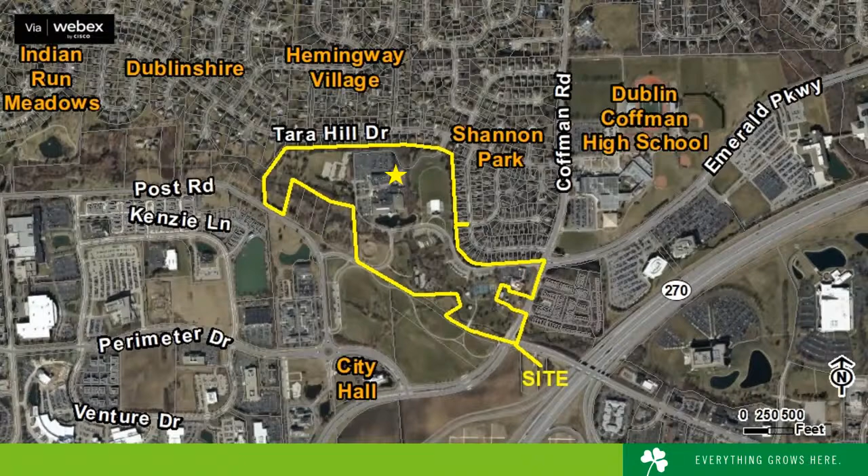These are the existing conditions of the project area adjacent to the senior lounge at the Dublin Community Rec Center.

Since 1995, there have been multiple amended final development plans for the site modifications, including a Dublin Community Rec Center expansion and the bocce ball courts, which are anticipated to become an outdoor space for group activity. The commission provided informal feedback on the proposed mobility hub on December 8th of last year.

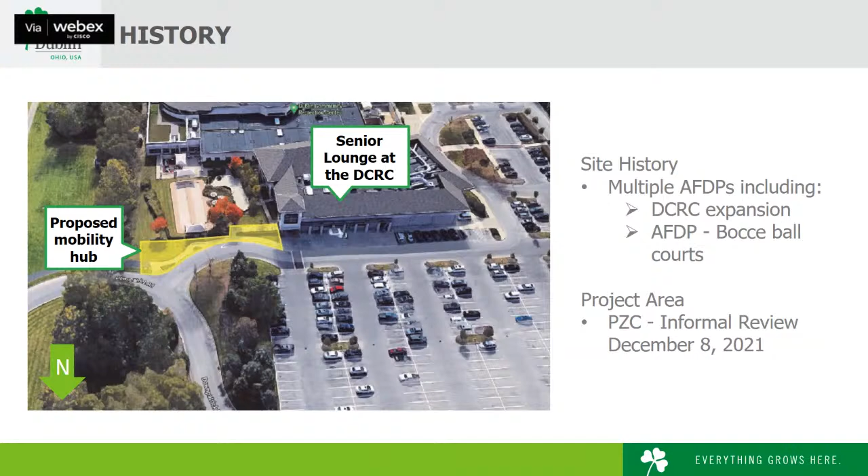The proposed mobility hub is 1,858 square feet, which includes 3 canopies shown here highlighted in blue: one over a seating area, one over bike parking, and another over a COGO station. The mobility hub features various seating, a bike repair station, mobility kiosk, and new landscaping. A minor text modification is required for the mobility kiosk to permit a digital changeable copy sign.

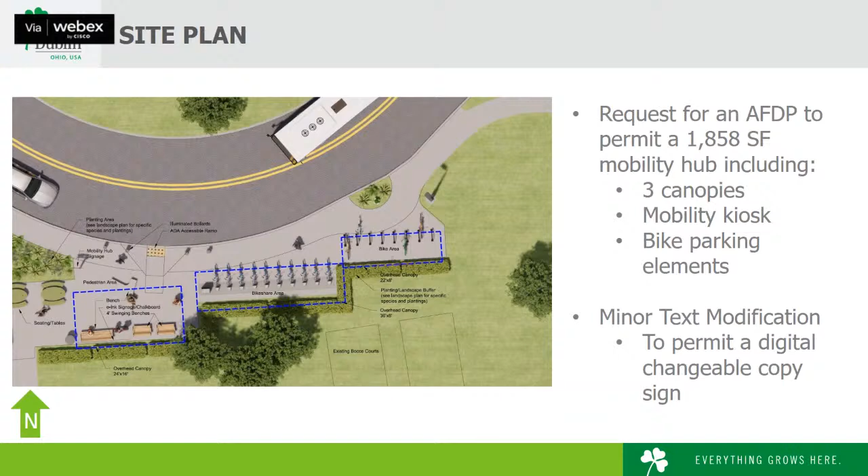This is the rendering for the mobility hub in its entirety. Various seating options are shown, which include picnic tables and benches. The mobility hub will also have various bike parking, including a COGO station.

Colors and materials have been chosen for the canopies, which include wood cladding, gray steel framing, and the colors of additional items in the mobility hub are gray or another muted color option, with the exception of a pop of color for the green picnic tables.

The criteria is either met with conditions, or not applicable. The proposed minor text modification is consistent with all applicable review criteria, and approval is recommended to permit one digital changeable copy sign for the Dublin Community Rec Center Mobility Hub in accordance with the following: that the sign is located on the property to which it refers, that the sign is not visible from the public right-of-way or adjacent properties, and the sign does not exceed 8 square feet in size.

The proposed amended final development plan is consistent with all applicable review criteria. Planning recommends approval with the following conditions: that the applicant continue to work with staff on all canopy lighting to meet the flush mounting requirement, or the lighting is positioned behind the purlins to minimize glare. That the applicant will continue to work with staff on finalizing all 3 canopy locations and the relocation of the existing utilities within the disturbed area to the satisfaction of the city engineer.

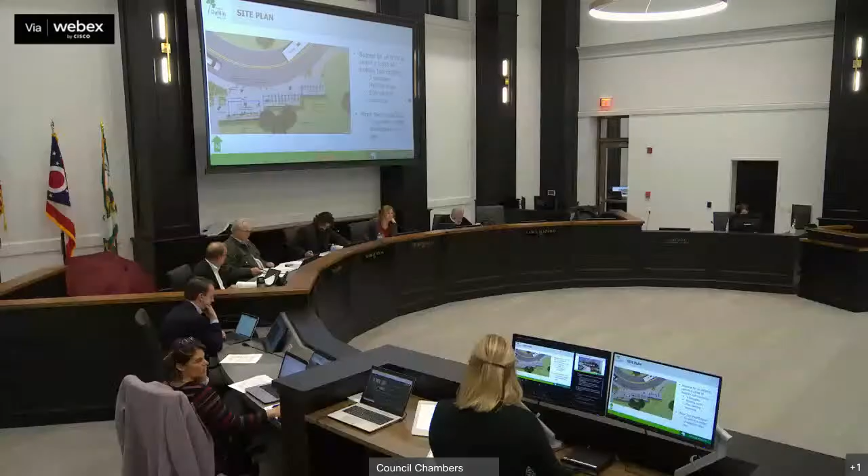For what it's worth, Mr. Way, on the civil plan, sheet 15 of 22, those canopies extend further, which I did take note of. I just wanted to confirm it because on the illustrative, it shows the bike sticking out, and I'm thinking, why do you have a cover if your bikes aren't covered?

So it looks like the blue lines just shifted on the rendering, perhaps. So confirmation, yes, bikes are well under the cover. Okay.

And one other question about the ADA ramp. Because of the slopes and all of that, it sits right in the middle of where people are circulating. And I know you're going from the pedestrian shelter to perhaps a vehicle. I assume that if you're in a wheelchair, you would go down the ramp and somehow that vehicle is then picking you up on an inside ramp of the bus or whatever, or is it somebody in a car? I'm just wondering, is that the ideal location for that functionality?

It seems like it's disruptive to the sidewalk and it doesn't make it even. I know it's kind of the direct route, but I feel if it's off to the side a little bit more, or somehow further to the west, it would not be right in the middle of everything. I don't know if that could be looked at.

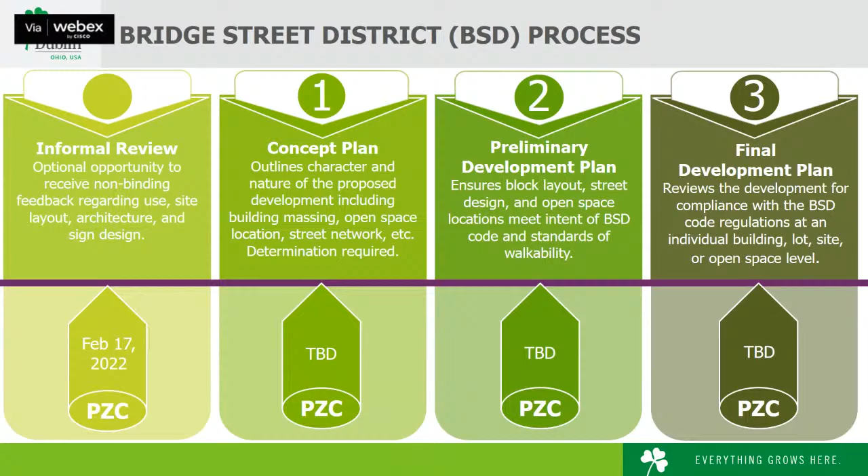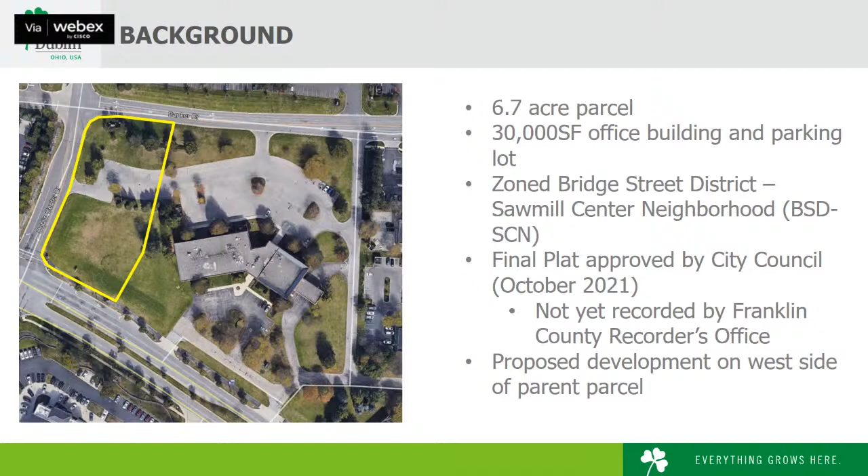A bit of background regarding the entirety of the site. Shown on the screen is the entire Fifth Third site, which is 6.7 acres in size. It includes a 30,000 square foot office building and parking lot, and is zoned Sawmill Center neighborhood. Back in October of 2021, this site was before City Council for a final plat, which created two separate lots. One contains the existing office building, and the other creates the lot highlighted in yellow. This plat was approved in October. However, the city understands the plat has yet to be recorded, so this lot is currently not created. However, the intended development we'll be reviewing tonight would go on this future parcel.

So this site is located within the Sawmill Center neighborhood. It is one of the few special neighborhoods within the Bridge Street district that has its own set of requirements. Bridge Street district establishes neighborhood districts where special attention to location and character of buildings, streets, and open spaces is important to establish a mix of uses that fulfill the objectives of the area plan.

Some of these special conditions for this district include encouraging active mixed-use pedestrian-oriented development that encourages interconnected site layouts for pedestrian access. Additionally, you'll see the map on the screen for the specific neighborhood, and the star represents the location of the site we're considering tonight. Some of the items this map considers are areas where a shopping corridor is considered, where specific building types are permitted, as well as potential gateway locations. You'll see there is a dashed circle located at the intersection of Dublin Center Drive and West Dublin Granville Road.

So this site would be considered for a potential gateway location. Gateway locations are points of identification that lead into a neighborhood, kind of an introduction into a specific area of Dublin. This can be identified through architecture, landscape, or public open spaces. One area somewhat adjacent to this is the Chase Bank development located on Banker Drive.

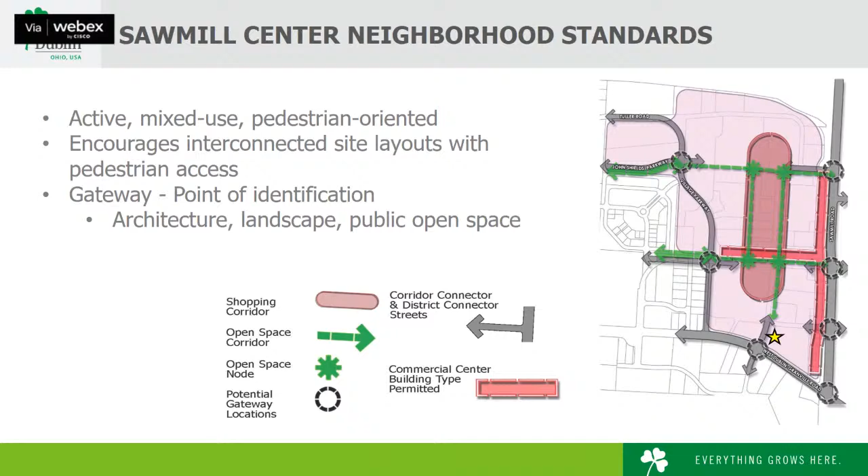They were also responsible for providing a gateway feature, if you're looking for any reference for this in the future.

Principal frontage streets require the most emphasis within the district, as they are the highest designation along most of our major corridors. However, when there are two principal frontage streets located adjacent to a site, the higher designated street requires more emphasis. So in this case, it would be West Dublin Granville Road, because it is a corridor connector.

So the applicant is before you all today to receive informal review of their use, as well as their architecture, conceptual signage, and site layout. We'll start with the use.

The applicant is proposing a micro-emergency hospital. This would fall within the hospital designation within the Bridge Street district, which is considered a conditional use in this zoning area. It does have one use-specific standard regarding the gross floor area. This proposal would not come close to that requirement, so it would fall within the use-specific standard.

As stated, this is a conditional use, so future approval of a conditional use would be required with the Planning and Zoning Commission. This is typically done with the preliminary development plan. Should an application pursue to that distance, they would be required to meet the conditional use criteria listed in the zoning code. A few additional items regarding the use.

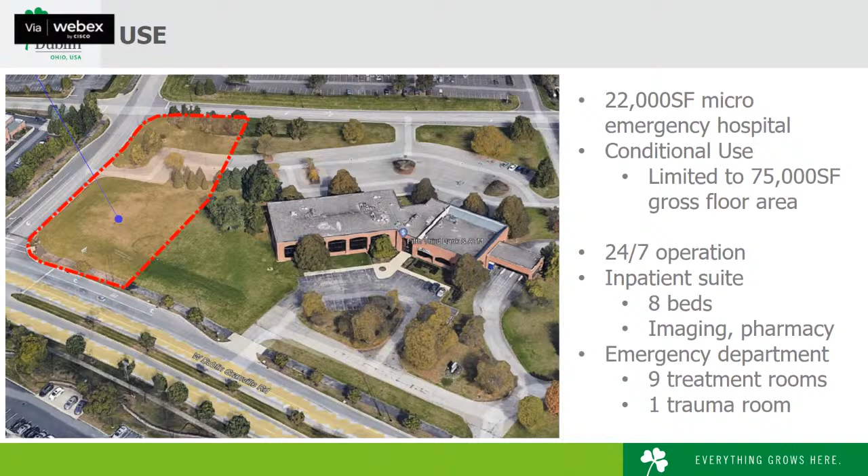The site does have sole access off of Banker Drive, as Dublin Center Drive and West Dublin Granville are principal frontage streets, which eliminates any opportunity for access off of those roads. So it is pushed to the northern property line off Banker Drive. That does lead into a 53-space surface parking lot, which runs down the rear of the property, but also includes a parking wing between the building and Banker Drive.

Currently, the site does include 3 potential open space areas: 2 located south and southeast of the building, and 1 up near the intersection of Banker and Dublin Center. These items would continue to be discussed and designed as we get to a final development plan, should this application continue to pursue.

Additionally, as stated earlier, there is a gateway opportunity here, which would be located at the southwest corner of the site and of the building. The applicant has identified this space. However, it is purely conceptual at this moment and would need to be further discussed with the applicant.

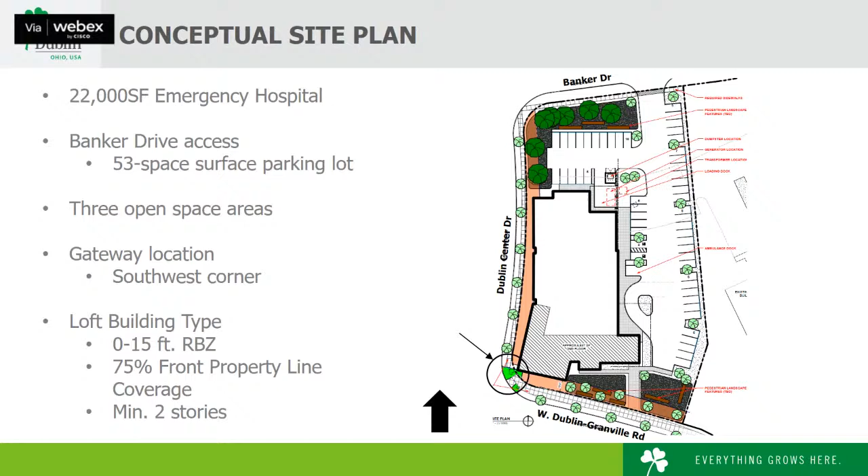There are always opportunities for waivers in these areas based on what is shown currently, as the building is not pulled up to West Dublin Granville, and part of the RBZ is filled with the open space type, which is permitted. However, the commission will be asked to describe whether the current emphasis on West Dublin Granville Road is sufficient with both the building and the open space.

The applicant has provided some conceptual architecture for all 4 elevations, shown on the screen on the north and south elevations. The south elevation is West Dublin Granville Road, so that would be the most emphasized elevation as we move forward. Again, this is a 2-story massing with a 1-story transition towards the north part of the property.

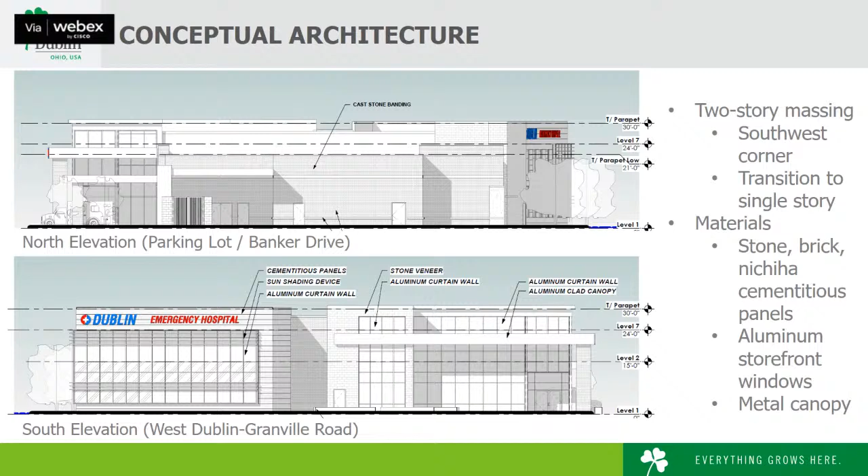The materials that are chosen would be stone, brick, and a cementitious panel. Both the stone and brick are primary materials, with the panels being a secondary material. There will also be aluminum storefront windows and a metal canopy on the east elevation, which currently holds a proposed sign.

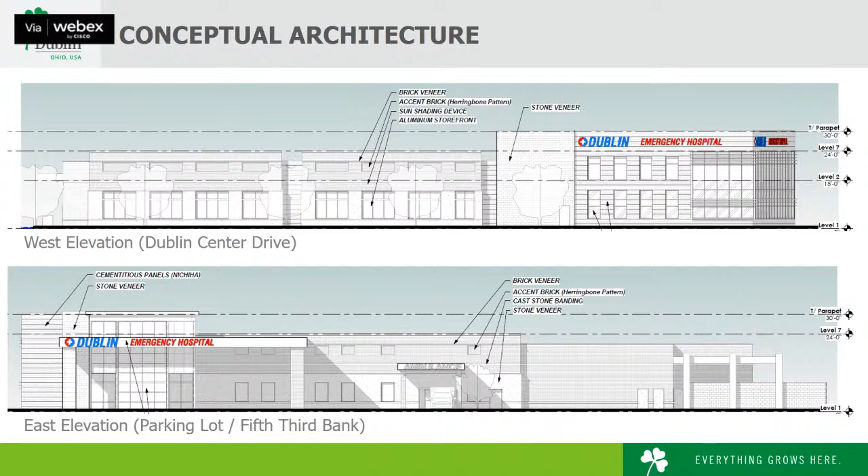Shown are some conceptual massing images to give you an idea of what this building would look like should it be sited where it currently is.

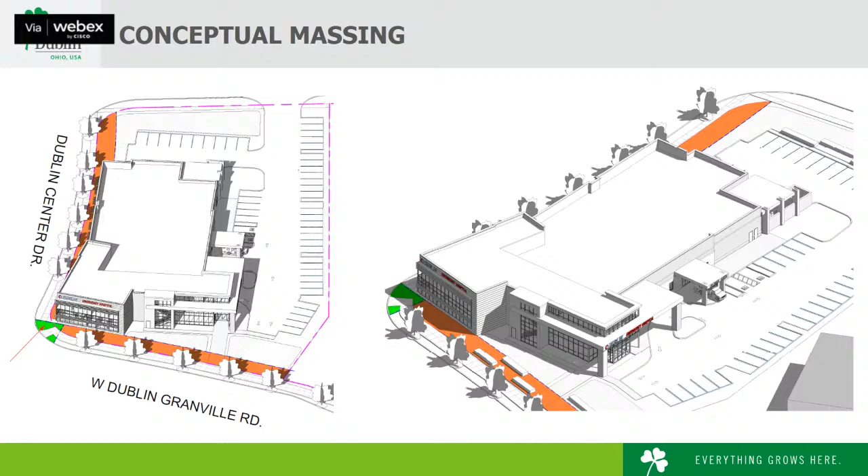Finally, staff is looking for feedback regarding the signs that are currently proposed. There are 3 wall signs and a potential monument sign, which would be next to the entrance into the building or into the site. The code does allow for 1 wall sign per street frontage, so they would be allowed 3, 1 on each of the frontages, located within the 1st story of the building and a max of 50 square feet each. So currently, what is shown would require a master sign plan.

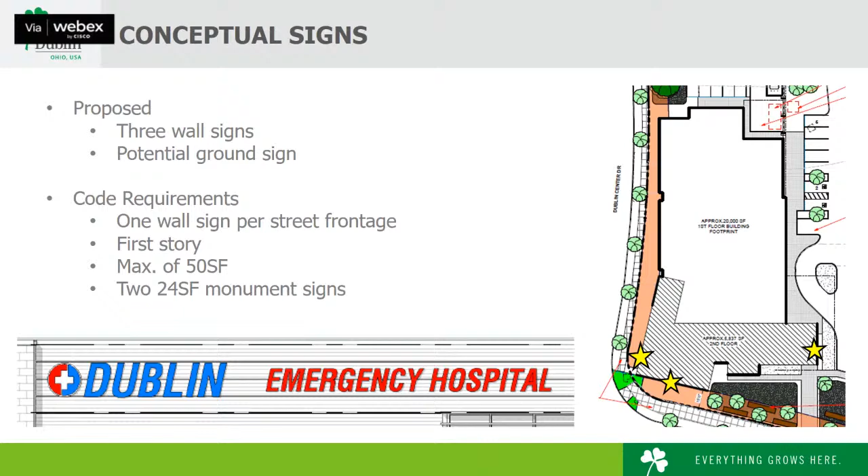It should be noted that master sign plans are intended to allow applicants an additional degree of flexibility and creativity in their design and display. However, they're not intended to permit larger or more visible signs and are not intended to allow a greater number of signs. So the board is asked to provide feedback on what is currently shown.

So with that, there are 5 discussion questions that we have for you all today. The first is regarding the conditional use and whether the commission feels that that is an acceptable use within the Bridge Street district at this site. Second, is the building siting appropriate given the West Dublin Granville Road priority from a planning and engineering perspective?

Is the commission supportive of the proposed parking lot layout? Is the commission supportive of the conceptual massing and materials or architecture of the building? And would the commission support the conceptual height, size, and design of signage on this site?

Additionally, if there are any other items that you would like to discuss, we are open to hearing that. The applicant is here to answer any questions that you have or address anything that I may not have discussed. Thank you very much.

Thank you, Mr. Hanschel. If the applicant is here, would you like to come up and make a statement?

The microphone is now on. Thank you. Maybe I can talk better with my mask off, if that's okay.

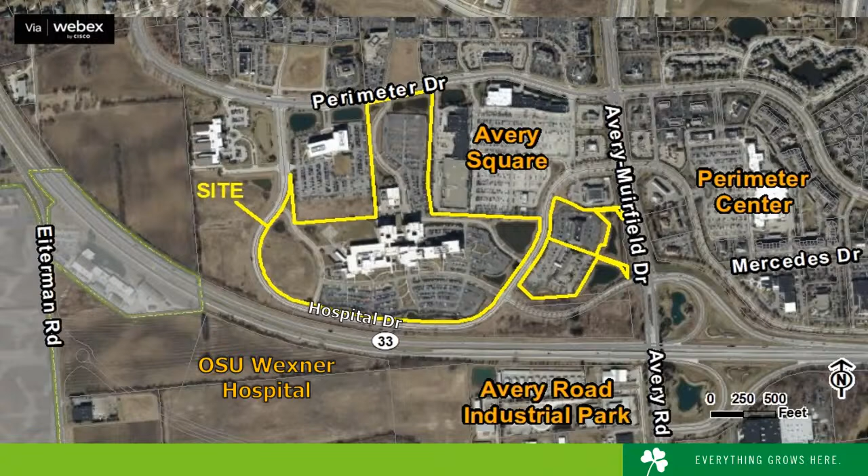This is a request for review and determination of an amended final development plan for the Ohio Health Dublin Methodist Hospital and their updated sign plan. The site is highlighted in yellow on your screen. We'll be focusing on the larger of the parcels, highlighted at the center of the screen. This is a 53.28 acre site zoned PUD, Planned Unit Development District, for the Ohio Health Campus. A bit of history regarding the development of this site.

In February 2004, this was rezoned to PUD for the current use. In May 2005, the final development plan and sign package were approved for the 310,000 square foot hospital. November 2006 was when the medical office building was approved and added, which is 99,000 square feet. Then in 2009, there was an amended final development plan for minor modifications to new signs throughout the campus and signs to the medical office building.

As this was a rezoning and this is a PUD, there is a development text that accompanies the site, approved in 2004 with the rezoning. The current text does not limit number, size, or height of new or existing signs, but it does state that signs are to be appropriately sized and adequate in their exposure to allow passing traffic to easily identify and locate the campus. Planning and Zoning Commission does have full review and approval discretion of signs. It should be noted that staff would not anticipate development text as general as this one to be approved should something come forward in the future to City Council.

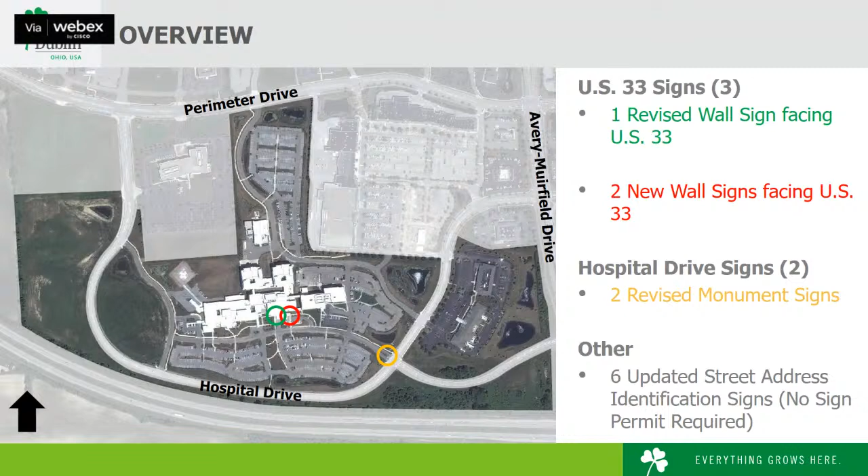Shown on the screen is an overall view of the site. We will be touching on the revised and new signs proposed today with the sign package. First, the applicant is proposing to revise the highway wall sign, highlighted in green and circled at the center of the south elevation of the hospital building. Additionally, they are proposing two new wall signs, located on that same elevation along US 33 and Hospital Drive. The applicant is also proposing to modify the two existing monument signs located at the main entrance to the southeast of the site, highlighted in orange. Finally, the applicant is proposing to update its street address identification signs. These typically do not require sign permits, but they would just be modifying the color.

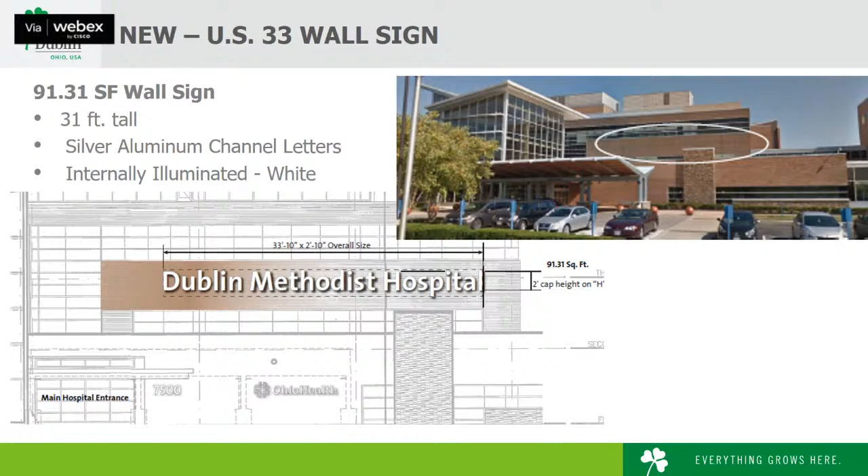The first of the two new wall signs proposed is shown on the screen. This is identified as WPI3 in the sign package. The applicant is proposing a 91.31 square foot wall primary identification sign, which will be located above the main entrance into the hospital and mounted to the existing brick facade. This is 31 feet in height from the top of the sign to grade, and similarly will be constructed of silver aluminum channel letters, internally illuminated white.

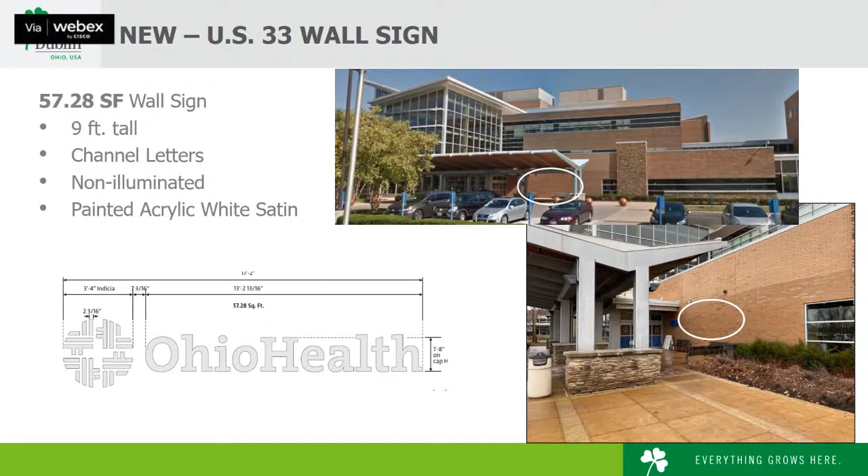Going through what is existing in terms of square footage and height versus what is proposed, we are moving from one existing 356 square foot sign to 3 new signs totaling 478.59 square feet in size. This does increase the total square footage of signs to 122.59 square feet over the original, an increase from the original sign count. As stated, the development text does not limit the number, size, or location of these signs, and it is up to the discretion of the Planning and Zoning Commission for approval of those.

Additionally, on the site, the applicant is proposing to revise 2 existing monument signs located on the entrance boulevard off of Hospital Drive. Both of these signs are currently 62 square feet and will remain 62 square feet. Currently, there are blue channel letters mounted to the existing brick monument sign. The brick monument sign will be maintained, but the channel letters will be removed and there will be a new aluminum cabinet with blue push-through letters that will be internally illuminated.

The applicant is proposing to paint the recessed brick base just below the new cabinet, which will stand 5 feet in height. Staff is recommending that the applicant provide brick that is complementary to the existing base rather than painting brick to complement it. Additionally, the applicant did not provide a landscape plan. However, staff is recommending that they provide one to remain consistent with the requirements of the zoning code.